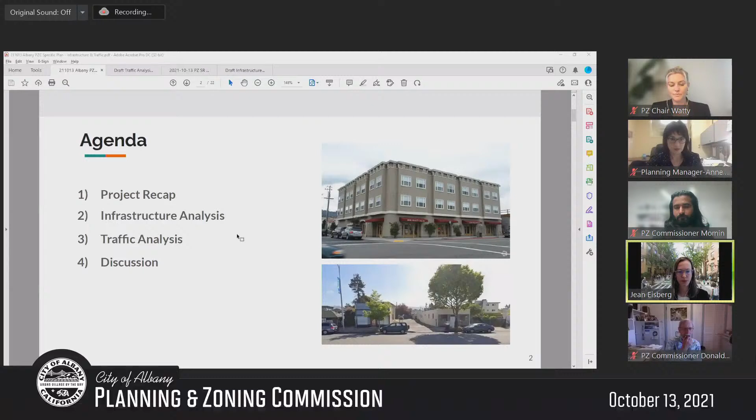So the reasons that we do this are at least three. First, we want to make sure we identify any necessary infrastructure improvements. These are primarily heavy infrastructure improvements, water, wastewater, to support development of the specific plan. So understanding pipe upgrades, things like that. This helps ensure that we want to make sure these improvements proceed in tandem with the specific plan. The general plan talks about this, but we want to make sure those infrastructure systems are in place when the new development comes in.

And then the third piece is that CEQA requires that we do this. So we're also evaluating the plan with respect to physical impacts on the environment, consistent with the California Environmental Quality Act. So sometimes you'll see in the analysis this looks like two different methods. One, we're looking at the impact of the plan as a whole on infrastructure. And two, we're looking at the difference between what the general plan projected and what the specific plan projected. And the reason we're doing that is because we anticipate preparing an addendum to the general plan to satisfy CEQA for the specific plan, so that nexus between the general plan and the specific plan is important.

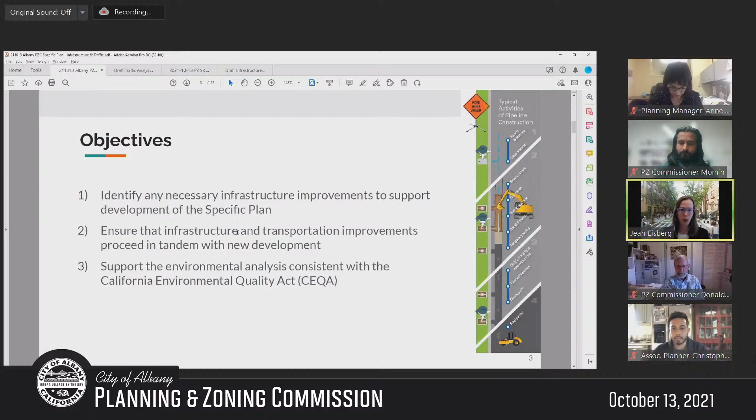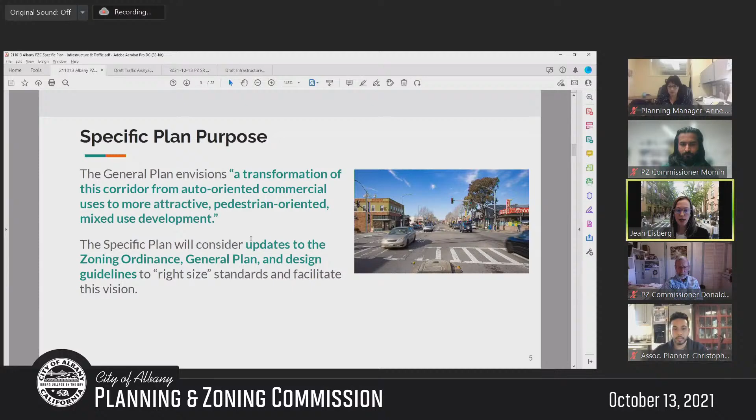So recapping the project, our purpose is dictated by the SB2 application for this, which funds this project and which was endorsed by the City Council. But the gist of this comes out of the general plan, which envisioned a transformation of the San Pablo Avenue corridor from an auto-oriented commercial corridor to more attractive pedestrian-oriented mixed-use development. This does mean we anticipate redevelopment of vacant sites and one-story commercial sites into taller buildings. So the specific plan will look at updates to the zoning ordinance, the general plan, since general plan amendments will likely be required, and changes to design guidelines. The intent is to right-size those standards to facilitate that more pedestrian-oriented mixed-use vision.

So we've seen this slide before, but looking across the corridor from city to city, you can see that Albany's heights are generally lower. In El Cerrito, the height limit's about 65 feet, 85 feet in some places with a density bonus. In Berkeley, it's 40 feet for residential projects or 50 feet for mixed-use projects. And as we've talked about, projects in Berkeley often use state density bonus law, which is how you see that 5 or 6 story development on San Pablo. Emeryville also has a local density bonus program. In Emeryville, we see about 50-foot heights on San Pablo Avenue, but up to 100 feet in certain zoning districts with that bonus. And then Oakland, obviously a much longer corridor within San Pablo Avenue, has a range of heights up to 120 feet downtown.

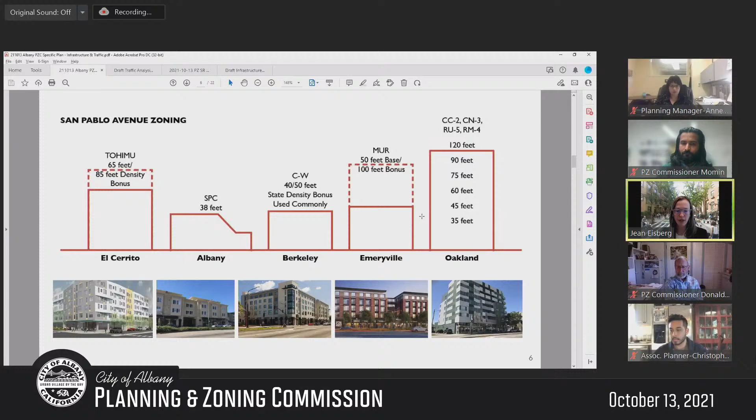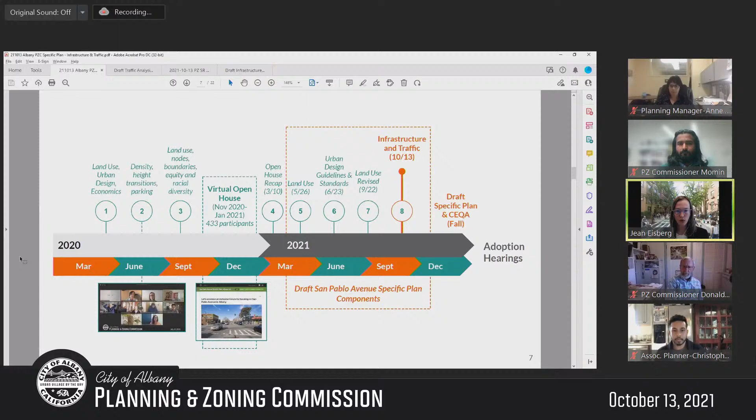So we've had a number of meetings with the Planning Commission along the way, most recently talking about land use just last month. We had a virtual open house over the winter, as you recall, with over 400 participants. Last time we spoke, just a few weeks ago, we did a straw poll that's included in your packet. I know there were some areas or desire to talk about some of these a little bit more, and staff will be coming back to continue those conversations at a later date. But for now, the results of that straw poll are attached to the staff report.

When we spoke earlier this summer in May, we provided an estimate of development potential, or what we call build out of the specific plan. That looked at opportunity sites on the corridor, looked at prototypical densities and heights to anticipate about how many units and how much commercial development could proceed on the corridor. So as you may recall, we predicted about 1,100 units across the corridor and about 45,000 square feet of commercial development.

As I mentioned earlier, there's a substantial amount of commercial development that would be lost due to the new housing. Again, removing about 1-story commercial uses on the corridor and replacing those with housing and smaller footprint ground floor retail results in a net loss of about 74,000 square feet of commercial development.

And so when we think about how we compare, I mentioned earlier, we're comparing the general plan and the specific plan for the purposes of, as we anticipate preparing the addendum to the EIR, that net change between the general plan and the specific plan is important.

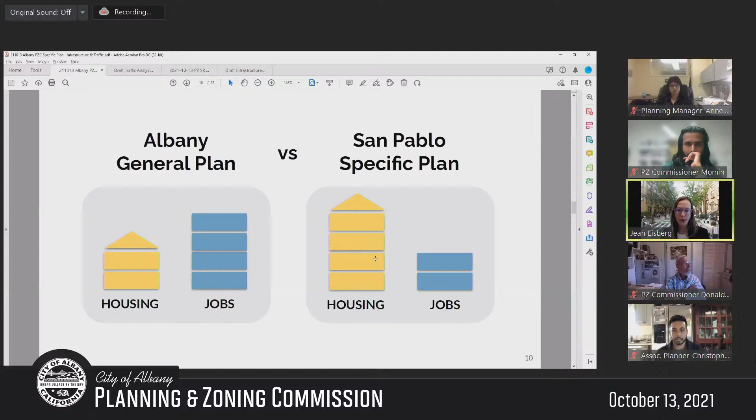So I'm now going to pass it on to Susan, who I introduced earlier. She's made it through the portal, hooray. And she's going to present this next piece of the presentation. Thank you, Susan. Sounds good.

Hi, everyone. My name is Susan Albanus. I'm with Sandis Civil Engineers. Our office is located in Oakland, and we have been brought on board for this process to review the infrastructure in the specific plan area. We were tasked with looking at several pieces of the infrastructure system. We looked at storm drainage, water, sanitary sewer, and the energy systems being electrical and natural gas. And then we also touched on solid waste as well.

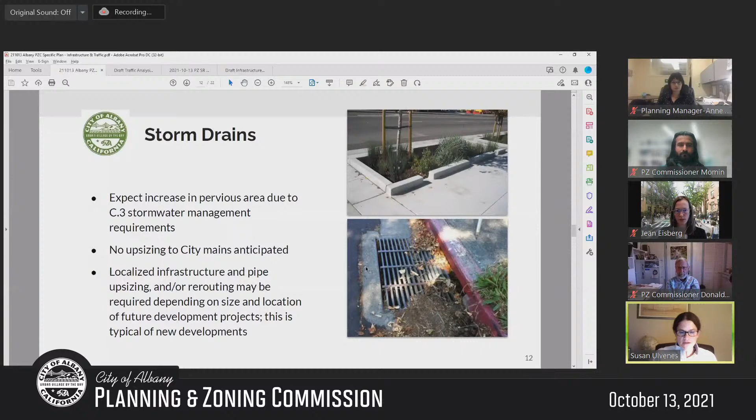So we started our efforts with the storm drain system. We reviewed city block maps. We spoke with city personnel, and essentially the development in the area would see not an increase in stormwater runoff. It would likely be a decrease in stormwater runoff just because of the state stormwater regulations that are passed down to different regions.

So locally, we have the C.3 stormwater requirements that are triggered at various sizes of development, but generally it heavily promotes the use of landscape areas, bioretention areas for treating stormwater, and also promotes the use of pervious pavement and other techniques as well that generally will lead to a reduction in the amount of impervious surface in urban areas that are primarily built out like this area currently is. So we would anticipate a decrease in stormwater runoff as a result of the specific plan area development.

And in speaking with city staff, there have been some system improvements recently for the storm drain system, but there are no anticipated issues with the development occurring due to the forecasted decrease in stormwater runoff. So there really are no current storm drains within the development area that would need replacement or upsizing based on this development.

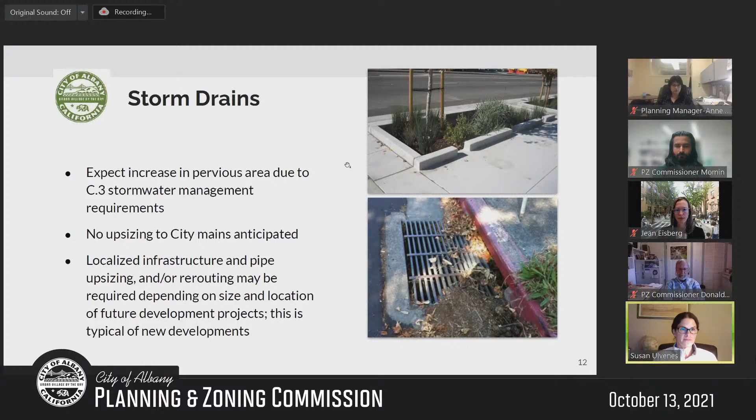Then we moved into water. Water is supplied by East Bay Mud. Again, with the built out area in the San Pablo corridor, there's not a lot of need for, or I would say no need for, additional water piping infrastructure due to the development. During our research, what we found were some old pipes and pipes that are smaller than what may be required for a development such as this.

There are a few 4-inch lines. There's a 4-inch water line in San Pablo and another one a block over. I'd have to look at, let me pull it up, a block over in Kains. There's a 4-inch water line there as well.

In our discussions with East Bay Mud, the 4-inch water line in San Pablo is on their radar for replacement and upsizing. That is not a direct result of any development; that is due to the age and the small size of that pipe. The 4-inch water line in Kains is also on their radar for future replacement, again due to the age. I believe they're about 90 to 100 years old, and the small size.

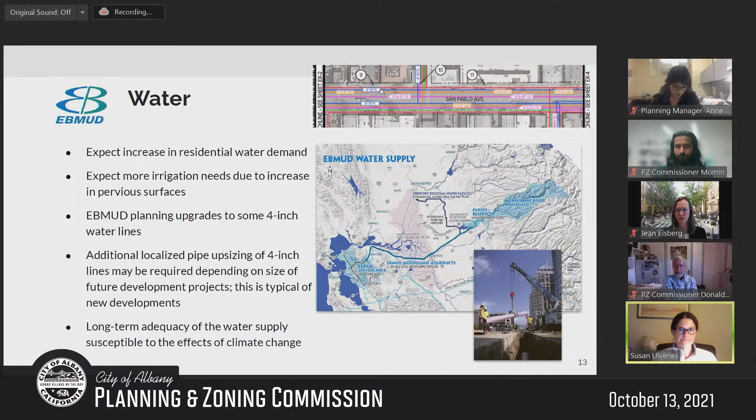Then we looked at the sanitary sewer in the area. Again, spoke with city personnel, looked at block maps, talked about any areas experiencing issues. And again, there are localized sanitary sewer pipes that either have been upsized or will be in the near future due to capacity issues.

However, looking globally at the San Pablo corridor development, there's no known pipelines that would not be able to support the development, looking at it as a global development. When a particular developer comes in and may be developing a parcel, there may be upsizing of lines or extending of utility lines necessary to feed that new development. If, for instance, it's going from single family residential to condos, townhomes, or commercial space, there may be a need to upsize a line or extend it further up the street. However, that wouldn't be something due to the overall development along the corridor—that would just be something the developer needs for that particular building.

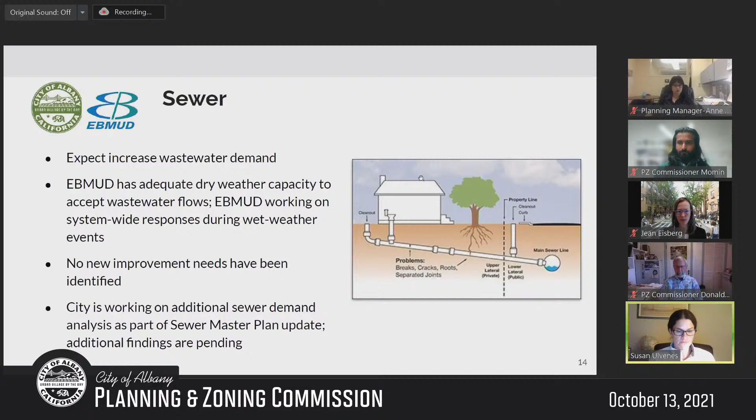As far as energy, as I mentioned, we looked at electrical and natural gas. This is provided by PG&E. Again, due to this being an urban built out area, the infrastructure is there, the supply—PG&E would not commit to supplying the development. That process gets triggered by filling out applications; that's when they make that determination. However, there was no indication or red flags. Generally, the infrastructure is in place, the existing buildings are being supplied by gas and electric. So there were no necessary infrastructure upgrades noted in the report for either gas or electric.

The same also goes for telecom. We touched on this in our research. Generally, internet and cable is supplied by a handful of providers, including Xfinity, AT&T, Earthlink, Sonic. Again, the infrastructure is in the ground or in the vicinity, and the buildings are currently supplied with telecom, so there aren't any anticipated upgrades needed there.

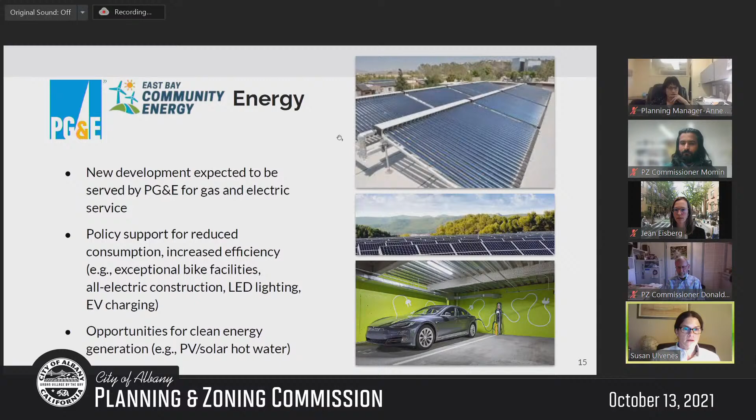Solid waste—again, looking more globally at where the waste is taken, the transfer station, the landfill, the recycling facility, the contacts we reached out to, the research we did—again, no concerns or changes needed for the development in the area.

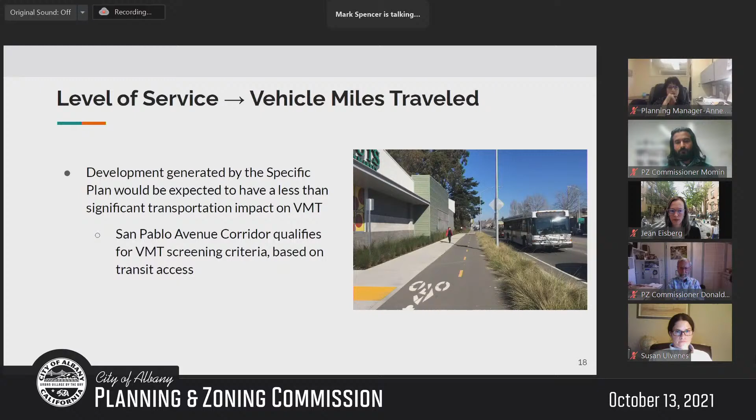On the next slide, please. Now, level of service is something we've typically looked at. In the case of the general plan in Albany, we looked at San Pablo Avenue and certain segments in terms of an A, B, C, or D. What we found is that under existing conditions, we're hovering around a level of service D, generally acceptable, but on the border.

You'll say, well, I drive San Pablo every day, as many of us do. I know it's congested, I'm waiting several cycles at lights, having trouble getting through from one end to the other. That's true, that is part of the effect. But in general, it's still an acceptable overall level of service when you look at it in totality. It doesn't mean we don't have periods of congestion or spot areas of congestion.

With the general plan, not the specific plan, the general plan itself was going to cause a shift from a D to an E on certain segments and certain times of day as we move through the corridor in Albany. That general plan reported that. What we wanted to look at is what's the difference with the specific plan now and the change in land use compared to the general plan. Would the specific plan result in anything getting worse, better, really any changes?

What we found is that it's actually very similar. The directionality of traffic does change a little bit because of the shift between residential and commercial activity, but in general, it doesn't change the service levels projected from the general plan to the specific plan. I'll explain why in the next slide.

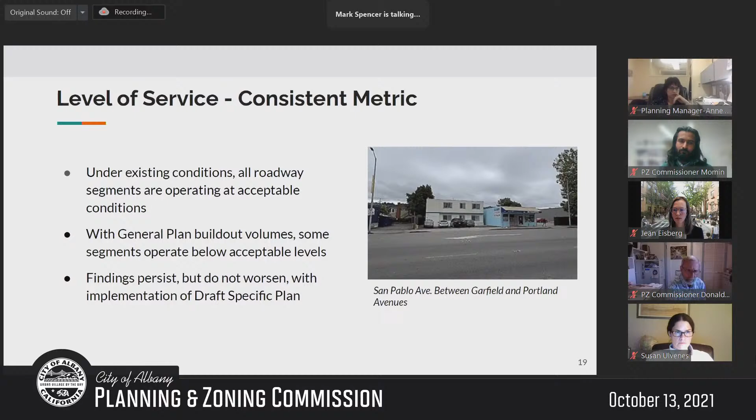The land use shift results in a change not just in land use, but also trip generation. As we analyze this, and this is in the report and background materials we prepared, in totality, when you look at the specific plan and the change in land use, we're going to have about 2,000 fewer daily trips on the road.

On a peak hour basis, which is really what we look at for traffic operations, in the morning it's actually about the same number of vehicles. There's fewer inbound and more outbound because with more housing, you have more people leaving and going to jobs in other cities and other locations. So you'll have that shift of people leaving in the morning, but the net effect is you also have less coming in because you'll have fewer jobs under the specific plan compared to the general plan. So that's pretty much a wash in the morning.

And in the afternoon, as commuters come back, you have that shift in travel patterns again. The net effect, though, in terms of the numbers, is we have about 260 fewer PM peak hour trips than we would have had under the general plan as it was proposed. So we're seeing reductions in traffic, and those reductions are leading to the fact that we're not seeing changes in service levels compared to what was projected in the general plan.

The numbers are not that great on the grand scheme of things. There's a lot of traffic in the area, so we're incrementally changing things, but not to any great effect. That's actually good in a sense, because if we're achieving other objectives, we recognize that we're not changing things dramatically on the traffic operational front or on the CEQA front. Next slide.

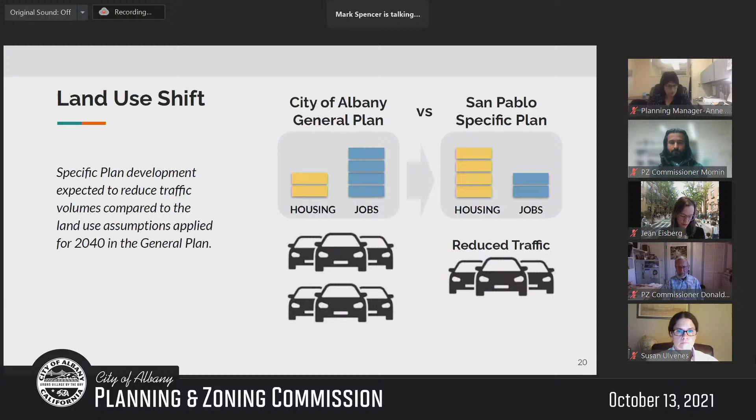Lastly, I just wanted to talk a little bit about policy implementation. I know this has come up in the discussions, and we were asked to touch upon it briefly in our transportation report. The city has gone through several efforts over the past decade in terms of adopting an active transportation plan, having a complete streets plan, the circulation element from the general plan, and even the Alameda CTC San Pablo corridor project, which is underway.

All of these have measures in place to talk about active transportation — how do we encourage more bicycle use, what kind of bicycle facilities, what kind of pedestrian facilities, how do we have good access to transit. The complete streets plan is about a street for everybody. So what does that mean? How do we allocate within the right of way — our lanes, our parking, our bicycle facilities, our pedestrian facilities, all of that. There's a lot of effort that's been put into thinking about that.

The specific plan that we're talking about tonight doesn't change any of those. It takes advantage of them in the sense that we're going to have more people in the area. We are going to have to figure out how to accommodate those people and move them to transit, move them into their vehicles, circulation, transportation, all of that goes into the area. But we're not actually taking away or deteriorating from anything that's been previously proposed. And that's good — it actually supports all of these types of policies that the city has already adopted and been focused on.

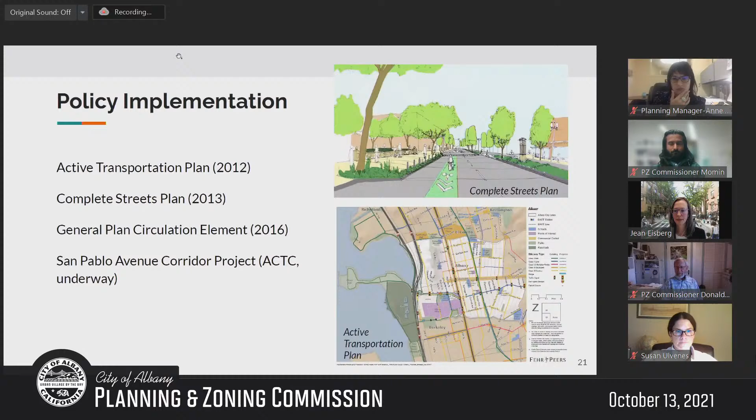Regarding the sanitary sewer, there was a question, and I think the consultant addressed it about some studies pending on the sanitary sewer. Can you speak to that a little bit more? It sounds like your initial analysis was that there's capacity, but there's some further study being done. Is that the gist of it, or can you expand a little bit more?

Sure, I can speak to the sanitary sewer. Was there a specific question or area? Well, if there's any pending studies to be done — and this was noted by at least one member of the public too — can we really sign off on the sanitary sewer being the right size, or do we have to wait for the results of the pending study?

I see. Jean, maybe you have some thoughts here too.

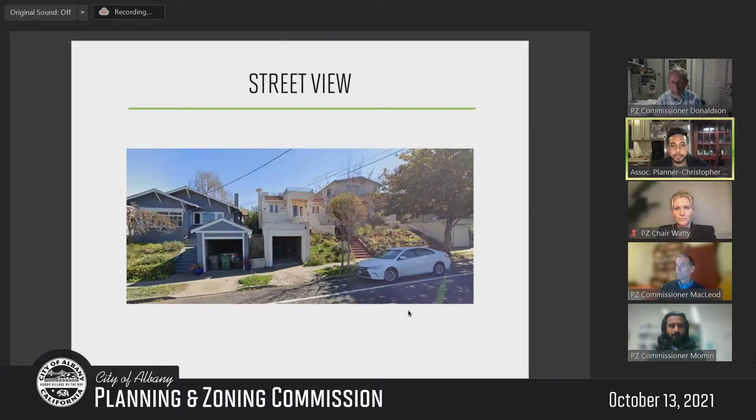Project requests: the applicant is seeking design review for an 857 square foot second story addition, a parking exception to allow a second off-street parking space in the front yard triggered by the proposed addition, and a conditional use permit to vertically extend the existing non-conforming north wall to accommodate the second story construction. Altogether, this project would result in a 5-bedroom, 3-bathroom, 2,099 square foot home with a maximum height of 27 feet, 11 inches.

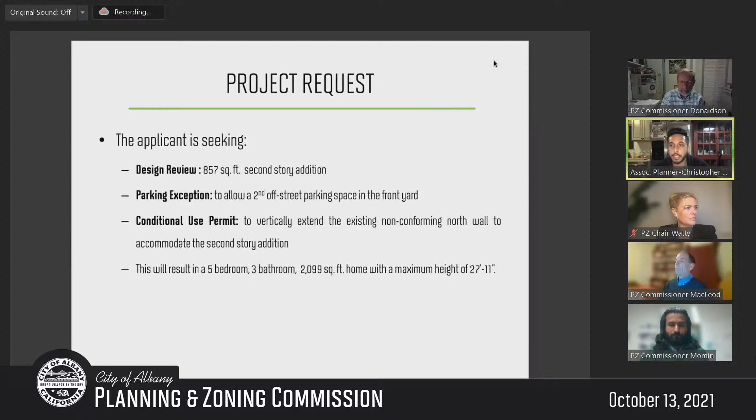Exceptional design. Projects which exceed 0.45 FAR are subject to exceptional design as reviewed by the Planning and Zoning Commission. These exceptional design treatments include a new craftsman style for the home, fiber cement horizontal lap siding on the exterior, relocating the existing garage under the home and establishing a new driveway via excavation, gable roof forms with decorative brackets under the eaves consistent with the craftsman style, wood fascia for all the roof forms, wood windows with fiberglass exterior cladding throughout the home, and a new wood deck in the rear yard.

Average perimeter height. Pursuant to section 20.24.050 floor area ratios of the Albany Municipal Code, the applicant is seeking to exempt the proposed lower level of the home from FAR calculations. What this means is for partially subterranean spaces of the home that have an average perimeter height of 5 feet or less, the area is excluded for purposes of calculating the FAR per the zoning code. The average perimeter height of the lower level of the home is proposed to be 3 foot 11 inches and thus has not been factored into the overall FAR calculations.

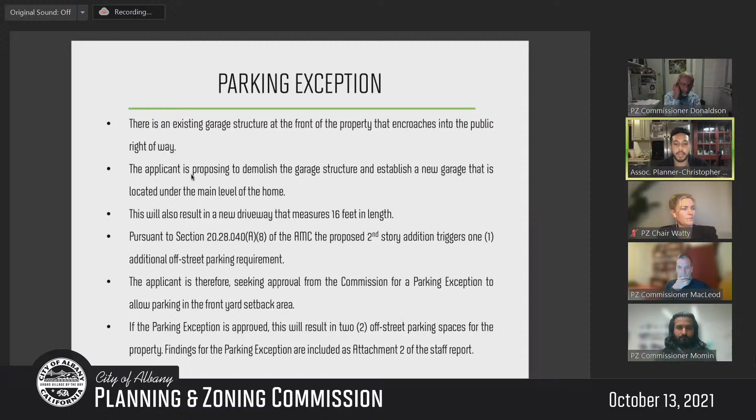Pursuant to section 20.28.040(A)(8) of the AMC, the second story addition does trigger an additional off-street parking space. Therefore, the applicant is seeking approval from the commission for a parking exception to allow parking in the front yard setback area. If the parking exception is approved by the commission, this would result in a total of 2 off-street parking spaces for the property. The findings for the parking exception were included as attachment 2 of the staff report.

Here is an excerpt of the site survey. You'll see that the garage structure is located here at the front of the property. From the front property line to the porch face is a little over 16 feet. And by demolishing the garage, that would leave a driveway that would be a little bit over 16 feet in length.

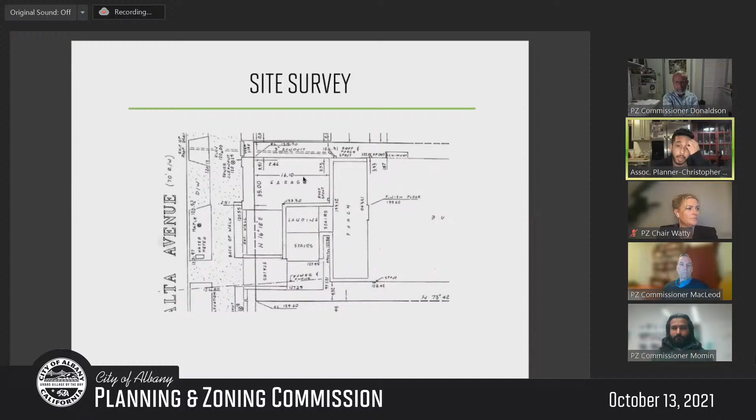Conditional use permit. The side yard setback requirement for the R1 zoning district is 10% of lot width, or in this case, with the subject property, 3.5 feet. The existing north wall of the home is slightly non-conforming with current setback regulations and is located 3.33 feet from the property line, where 3.5 feet is required. The applicant is proposing to vertically extend the non-conforming north wall to accommodate the proposed second story addition. Pursuant to Table 2A of Section 20.24.020 of the zoning code, a conditional use permit is required to vertically extend this north wall. The applicant is seeking approval from the Planning and Zoning Commission for the CUP to extend this wall.

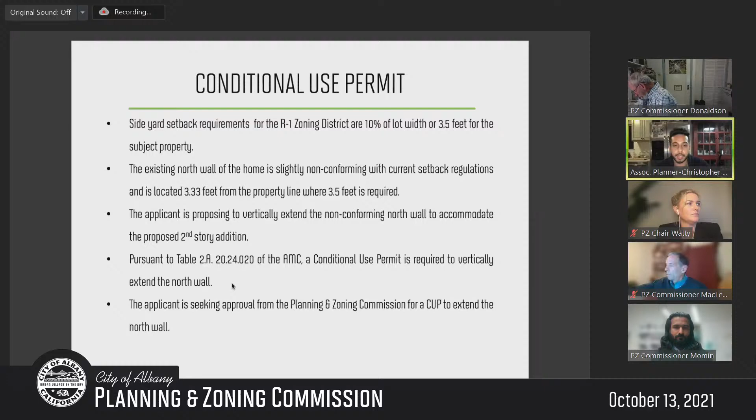Staff has received 1 formal correspondence in support of the project, praising the thoughtful design. The project is categorically exempt from CEQA per section 15303. With that, staff recommends that the Planning and Zoning Commission review and approve the proposed project subject to the findings and conditions of approval. Staff is happy to answer any questions, and we have the applicant in attendance as well.

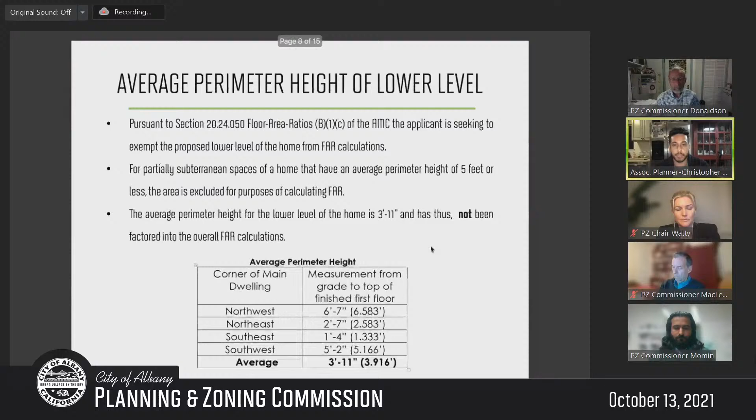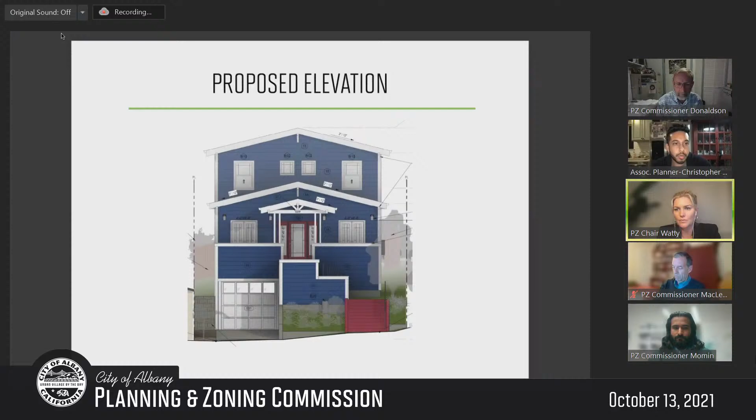Thank you. Great. And maybe before we open it for questions, does the project applicant have a presentation as well? I don't know if they have a presentation prepared, but her hand is raised, so I can let her speak. Sure, why don't we go ahead and open it up to the project sponsor, and then we'll turn it back if there are questions from commissioners.

Okay, can you hear me? Yes, we can. Thanks. Great. Thank you so much. And great presentation, Christopher. I really appreciate that. So I don't have a presentation. Christopher covered, I think, the basics for you.

I just wanted the opportunity to say hello and thank you all so much for your time and consideration of our project. My husband and I are really excited to raise our kids in the Albany area. We are so happy we finally found a home here. We've got 2 young kids. We love the neighborhood, the people we've met, the parks. And as our family is growing with kids and both of us working from home now to avoid costly commutes and spend more time with our kids, we do need more space.

And that's why we're proposing this expansion. We also want to apologize - you may have noticed some labeling errors. We originally intended to use the rooms as a family room and 4 bedrooms, but recognizing that the family room has a closet and not wanting it to look like we were hiding a bedroom, we made a last minute change to show it as a bedroom, which resulted in 2 bedroom number 2s. So we apologize for that.

The last thing I'd like to say is that we are certainly considering environmental concerns as something important that we care a lot about. Specifically as a structural engineer, I find that one way we can affect these concerns is to build resilient homes and buildings out of quality materials that will last through earthquakes. So I'm designing this home to be seismically enhanced, and we're carefully considering all building materials because we really want to make sure this is a home that will last. Thank you so much for your time.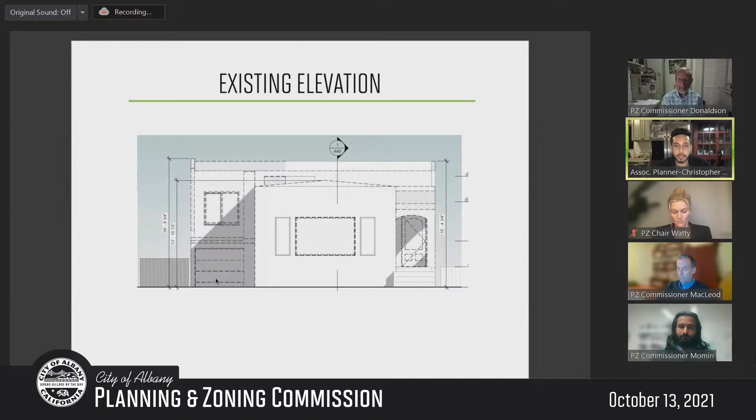The applicant is seeking design review for an 800 square foot 2nd-story addition to accommodate 2 bedrooms, 1 bathroom, and a new master suite on the 2nd floor. A conditional use permit is also being sought to demolish and rebuild a portion of the south wall, which is the garage, to address some dry rot repair and accommodate a new garage door. This overall project scope would result in a 4-bedroom, 3-bathroom, 2,049 square foot home with a maximum height of 27 feet. Here's an existing elevation of the home, and here's the proposed front elevation.

Exceptional design. Projects which exceed a 0.45 FAR are subject to exceptional design as reviewed by the Planning and Zoning Commission. These design treatments include a new contemporary architectural style for the home, exterior cladding in a combination of painted stucco and horizontal composite siding, a standing seam metal shed roof with a 12:3 slope for the second story, and double hung, slide, and fixed windows proposed throughout the home.

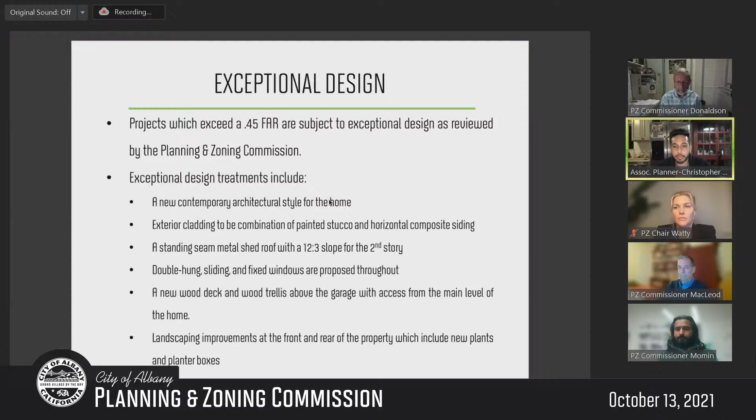A new wood deck and wood trellis above the garage space with access from the main level is proposed as well. A landscape plan was submitted indicating modest improvements to the front and rear of the property, including new plants and planter boxes.

Conditional use permit. The side yard setback requirement for the subject property is 3 feet 9 inches, or 10% of the lot width. The existing south wall of the attached garage is located 2 feet 6 inches from the property line and is thus non-conforming with respect to side yard setback requirements.

The applicant is proposing to demolish and rebuild a portion of the south wall to address dry rot and repair, and to accommodate a new garage door. A conditional use permit is required to demolish and rebuild the wall due to its proximity to the southern property line. The applicant is seeking approval from the Commission for the conditional use permit to rebuild the non-conforming south wall. Findings for the conditional use permit were included as attachment 2 of the staff report.

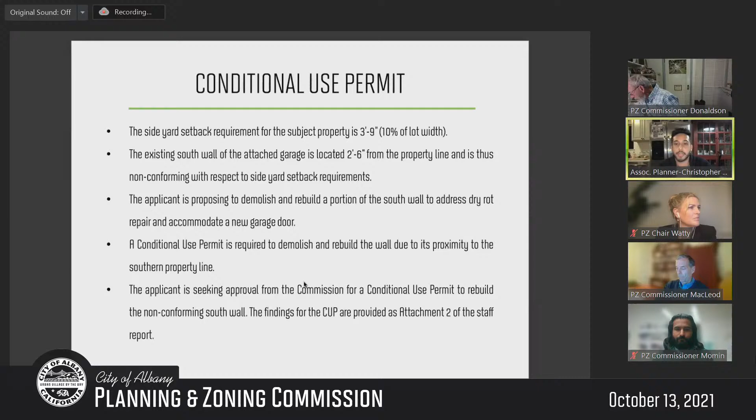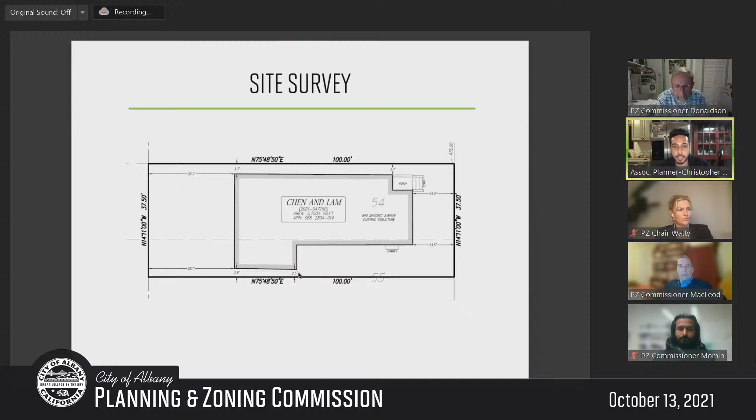And then here's a view of the site survey. You'll note that at its closest point, the garage wall is 2.5 feet from the property line, and at its widest point, 2.8 feet. There's an existing attached garage toward the rear of the home.

With respect to parking, there's an existing attached garage toward the rear of the home, which currently accommodates 1 off-street parking space. The applicant is proposing to demolish the front portion of the garage and rebuild it in kind. A total of 2 off-street parking spaces are proposed, 1 in the existing garage and 1 in the driveway in a tandem configuration. No additional off-street parking is required for this project.

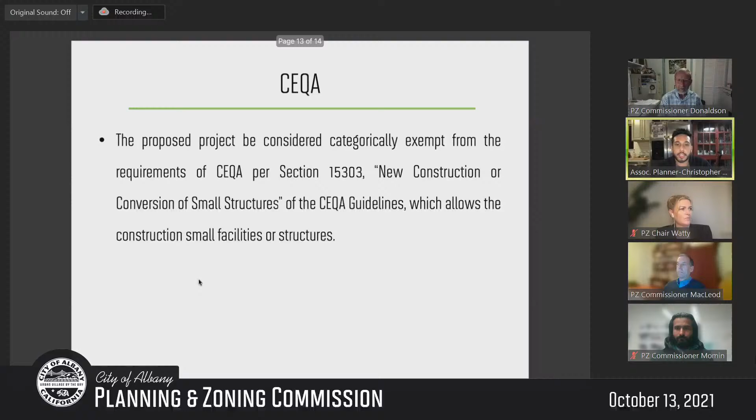Staff has received 1 correspondence from a neighbor voicing potential privacy concerns with the elevated deck and trellis above the garage. The project is categorically exempt from CEQA per section 15303. With that, staff recommends that the Planning and Zoning Commission review and approve the proposed project subject to the findings and conditions of approval. And with that, we're available to answer any questions. Thank you.

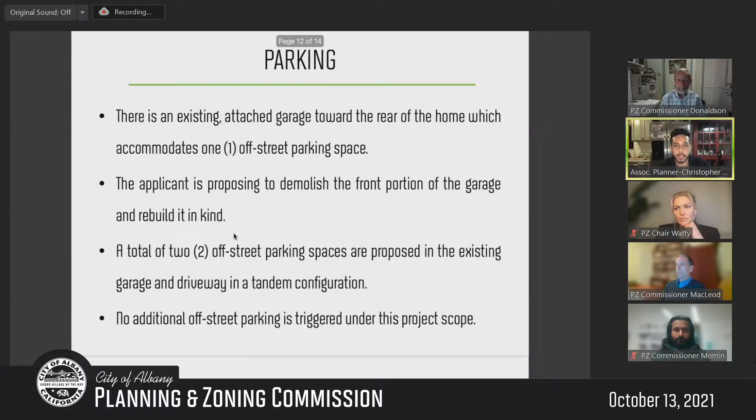Great, thank you, staff. Maybe similarly, we'll just have the project sponsor here with a presentation. Yes, I saw the project applicant. She is here. I'll allow her, Sujin, to speak. Yeah, why don't we go ahead and let her speak, and then we'll turn it back to the commission for questions. Okay, Sujin, you can speak whenever you're ready.

Christopher. Hi, Hi Sujin. Hi, can you let Dongjin speak for this project? Sure, one moment. Hello, hello, hello, can you hear me now?

Yes, hello. Okay, my name is Dongjin Seo. I'm a project designer for this project. Thank you for having me here today, and let me introduce this project briefly.

This new addition will be home to our client who has two little kids, one little boy and one little baby girl. The most important thing for our client is actually having all 3 bedrooms for their parents and kids at the same location. They are really concerned about taking care of their baby, so whenever there is a need, they want to be immediately accessible to their kids. That's the reason they added the second story addition where all 3 bedrooms are co-located.

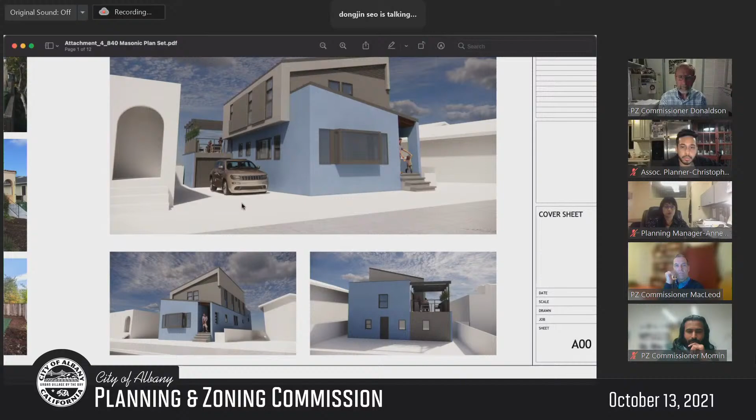Another thing, over the new exterior deck, we consider the privacy concern to the neighbor on the south side. So we introduced a fixed planting box, so that it gives a little bit of a solid surface to improve the privacy between these two neighbors.

So I think that's about it, and thank you very much for your time. I will appreciate any kind of comment on our project. Thank you very much.

Thank you. Commissioners, are there any questions for either staff or for the project applicant? Commissioner MacLeod, go ahead. I guess I have one question for the applicant.

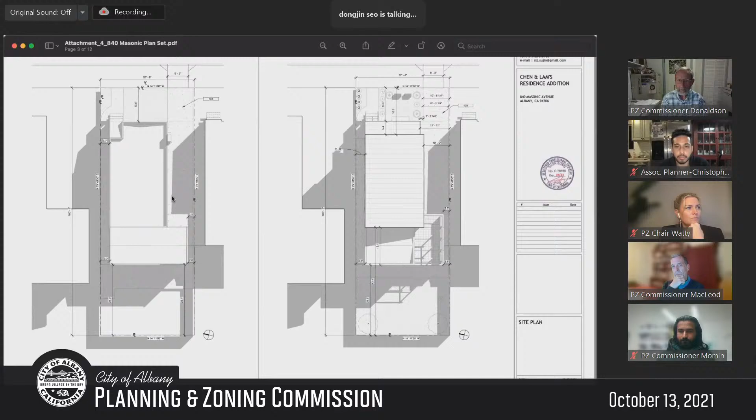Are you vaulting the interior spaces on the second floor underneath that big shed roof? Yeah, of course we take advantage of this roof shape as much as possible, but part of that space will be dedicated to the mechanical unit up there. But yes, we'll consider the higher ceiling for the bedroom along the north side. So it's not fully reserved yet.

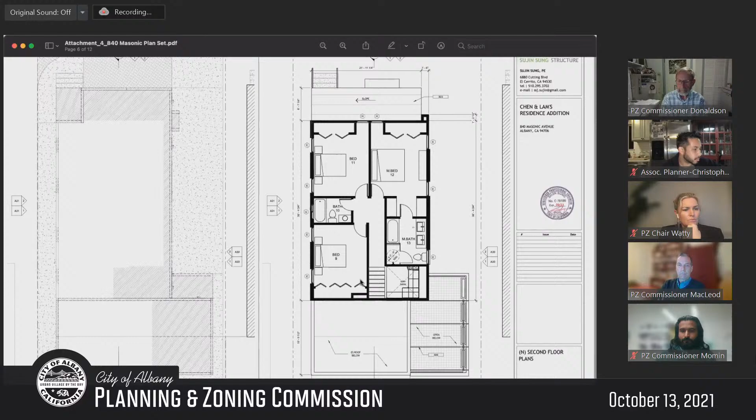Okay, thank you. I had a couple questions for the project engineer here. Can you clarify a little bit when you reference the composite siding? Can you give a little more detail of what that actual material is?

So the product that we are really looking at is actually the NewTechWood. This is a composite material, composited with wood and plastic. This material gives you the real wood look. Also, there is a color option that our client is really looking at, so it's pretty much similar to the rendering. The tone is a little bit different, but it's pretty much similar in texture and color to the rendering. So we consider that as the NewTechWood for the composite siding.

Got it, so it's a wood plastic composite material. Correct. That has a texture of wood, like a wood grain finish. Exactly, yes, correct. Okay, thank you on that.

And then just to clarify, so the windows that you're calling out according to the window schedule are Andersen 400 series. So those are vinyl clad windows, is that right? Correct. Okay.

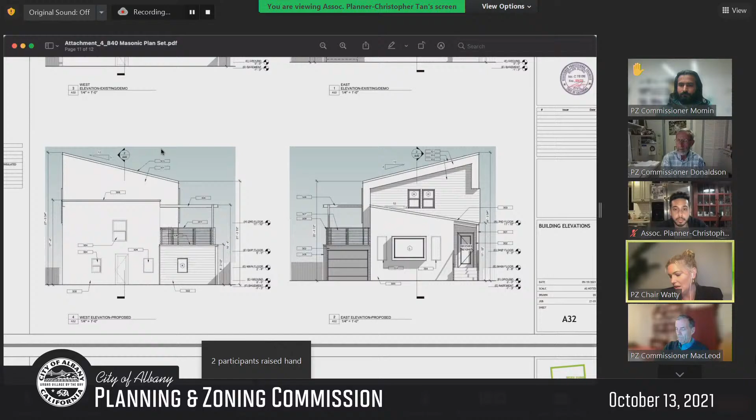And then I think those were my only—oh, maybe one other question. I'm just a little bit curious on the design intent along the north side of the second story addition, where that composite siding is applied, it just kind of spans. It feels a little arbitrary between the east and west side windows on that north side. I'm wondering if you can talk through what your design intention was, or sort of vision for it. It just, from the elevations, feels a little tacked on, but perhaps you can talk through your design intention there.

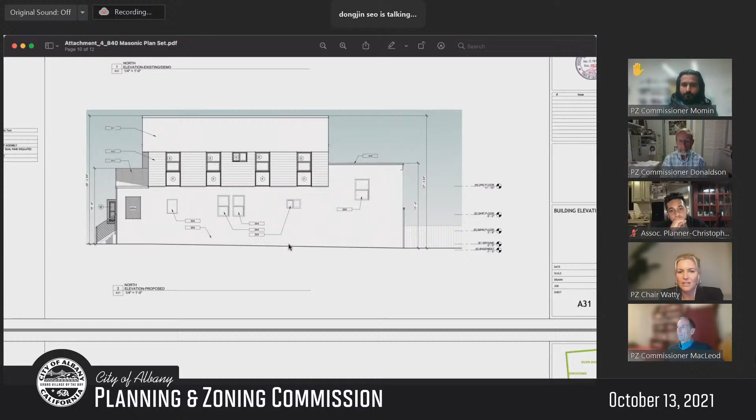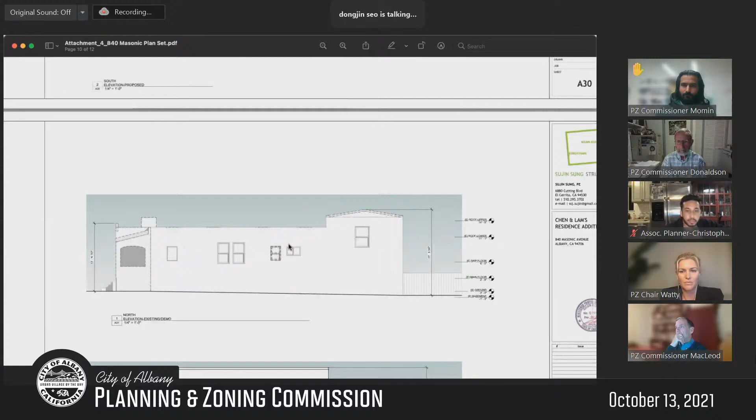Yeah, I know that it is really hard, of course. Because of the setback issue, this whole facade is really just flat. But the way I read the massing here, if you're looking at maybe the rendered three-dimensional view, it will be more clear. There is basically a bluish box at the bottom, and then there's a layer around the second volume, which just stops at the head of the second story window. So that's the actual concept. Actually, it would be great if there was a little bit of an offset from the composite material to the stucco above—then it would express the composition better, I think. But well, unfortunately we can't; it's got to be just a straight wall. So I think it's a little hard to achieve that kind of composition.

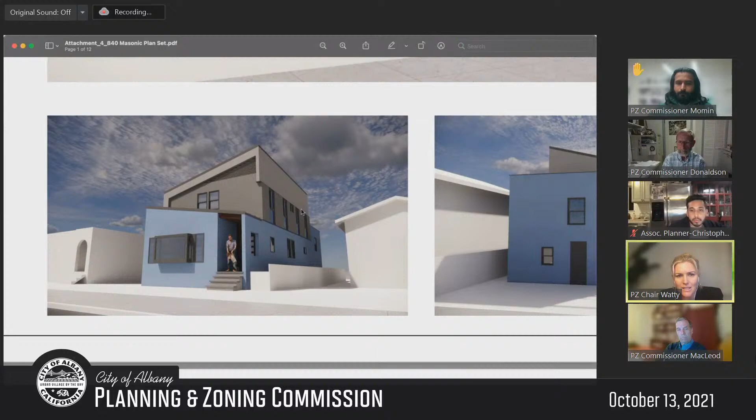And I was on the north face of the second story addition. So Chris, I think that's the south side that you're showing there on the bottom left. That is the north side. Oh, that is the north side. So this image is—oh, I'm sorry, right, I meant the south side. I meant the south side.

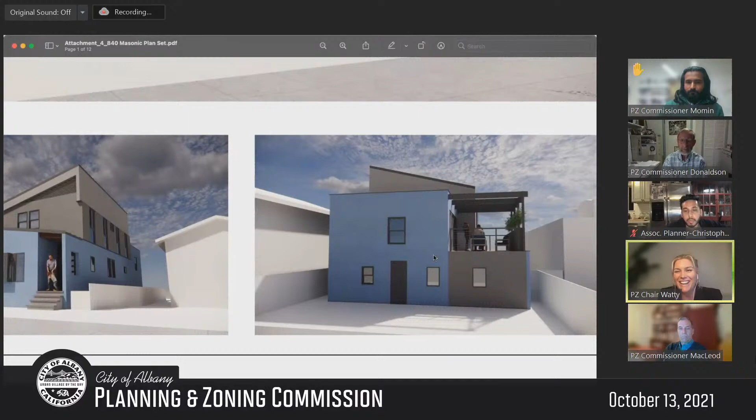Oh, you meant the south side, sorry. Don't know why you wouldn't know what I was thinking there. No, on this side, yes, where it's sort of applied between the two windows.

Just talking about how does that get detailed, given that it looks like it's probably just a couple inches proud of the primary building wall.

Yeah, I think in reality this is a rendering issue. I think it's not as accurate as the detail. I think the detail will have this siding material pretty much flush with the stucco finish. Okay, the elevations do show a couple inches as well, so the elevations seem to match the rendering, but I wasn't sure how that transition would be detailed.

Yeah, there will be metal flashing between the stucco and composite wood, so there will be a continuous flashing line there. Okay, so instead of there being this shadow line, it will be flat with flashing separating the stucco from the composite siding? Correct. Okay, thank you, I think that's all of my questions.

Commissioner Momin, you had your hand up, then we'll go to Commissioner MacLeod. Yeah, just a minor question about the composite panels. How do the composite panels perform in ultraviolet light, like prolonged sunlight exposure? Is there any possibility of them getting discolored? And if they do, what is your remedy for that? Would you be painting them?

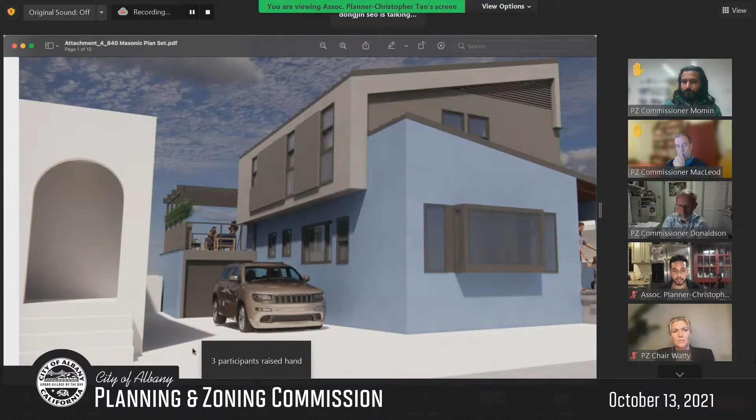No, there's no painting on it. You can think of this as kind of a Trex version of the siding. There is a little bit of sheen to it, a little bit of reflection. It's pretty much similar to typical wood siding.

Okay, so they don't get discolored over time, you mean the UV matter? Yeah, so I think this product is a little bit better than the previous version of the composite material. Okay, that's it, thank you.

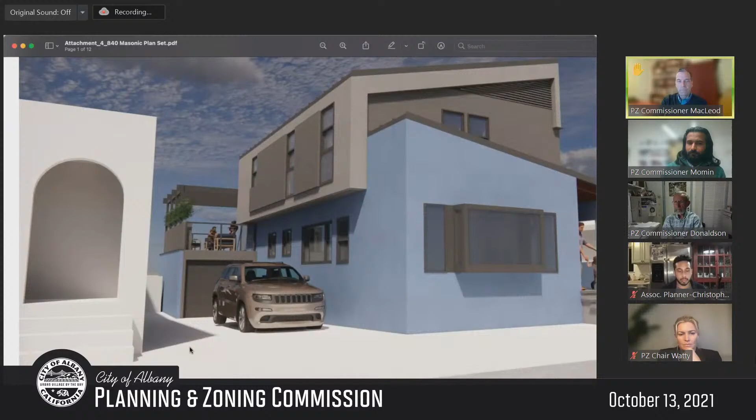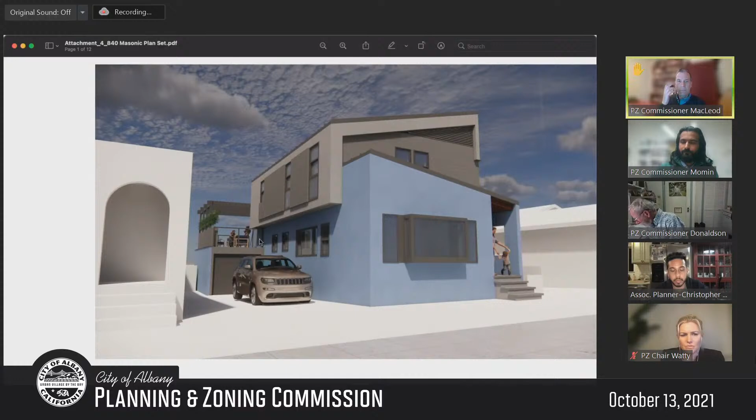Commissioner MacLeod? Yeah, my question is for staff. We have the non-conforming wall at the garage, but then the roof deck is actually extending into the non-conforming space, or into the setback. Isn't that required to have a conditional use permit to have a deck within a setback? I just know in my work, if we start extending into the setback with the roof, with any kind of deck, we are faced with additional requirements or restrictions.

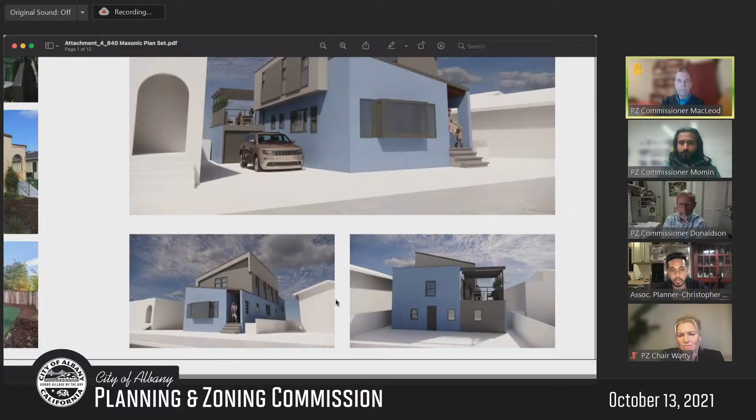So could you respond to that, please? I mean, basically the deck will be non-conforming. It's effectively a vertical extension of the non-conforming wall, which is how they can build that deck out. Of course, they'll have to, they're rebuilding a portion of that wall. They'll have to engineer that for live load on top, but they can do that through the use permit process.

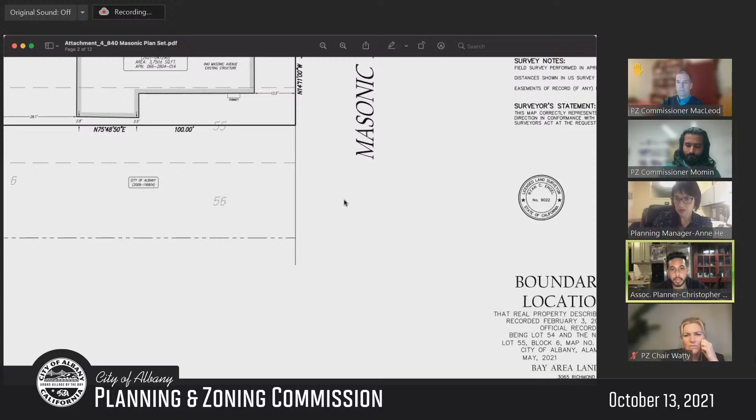So is that part of our conditions of approval, that the roof deck is allowed to be non-conforming? Seems like we're not addressing that. The use permit can cover the deck, yes. The code isn't explicit about roof decks in that encroachment area, because we're talking about the wall plane itself, since it's not a fully built wall. It can, the conditional use permit can also apply to that.

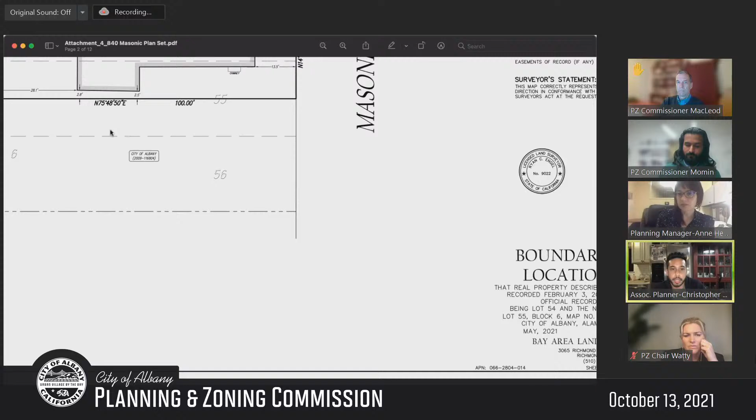Alternatively, a condition can be placed that the roof deck be recessed to be compliant strictly with setback regulations above the garage, but there was an existing wall there originally, which the applicant is proposing to remove to accommodate the FAR, reconfiguring with the second story addition. So there was a wall there above it that's enclosed, but the applicant...

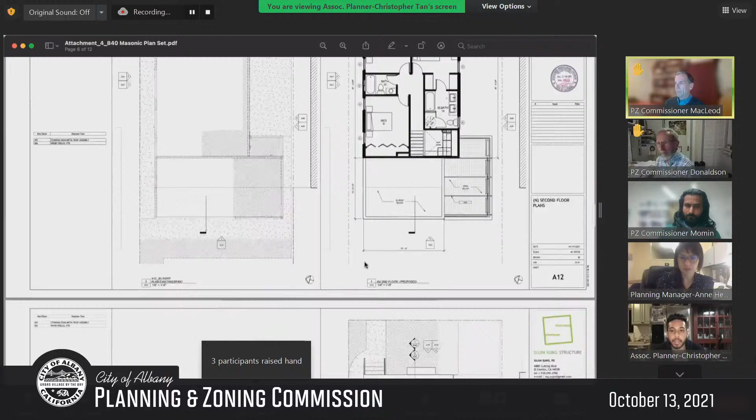Okay, so there was a second story structure there above? Yeah, if you look at, we can look at, oh I see, on the south elevation of the existing there was a room. It was all originally enclosed, yeah, where that deck is. Okay, so, all right, I still... right here, yep.

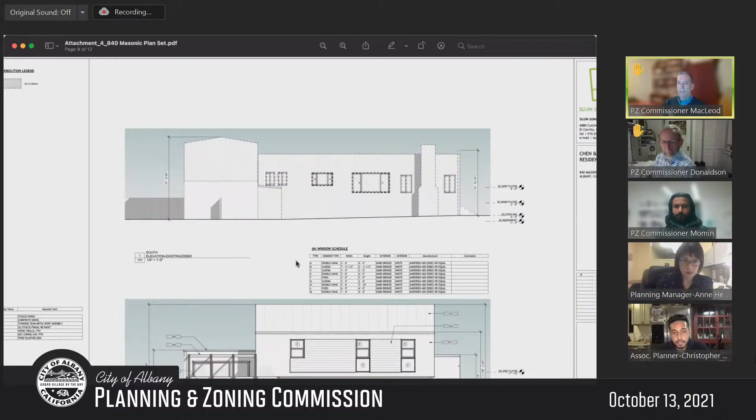So we are being asked to extend that, that non-conforming wall becomes part of the deck. I'm still a little confused as to how that deck is being approved in our language, or in the language of what we're asked to look at tonight. So, Ian, I had the same...

Am I on? Yeah, I'll just listen here. That's fine. I had the same thought, and then I went back and reread the staff report, and the sentence I thought was important said a conditional use permit is required to demolish and rebuild a portion of the garage and build a new roof terrace.

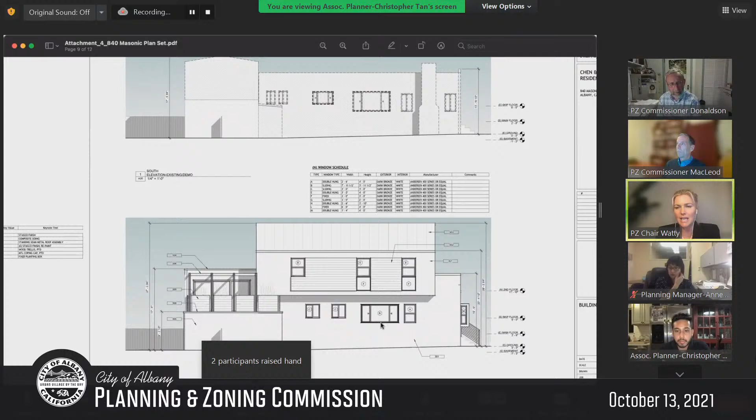Good evening, thank you. So my question really is concerning the fire department's access to the one side. I guess it was less than 3 feet from the garage to the side wall. I'm not sure if I'm correct or not. I was just curious what the setbacks are for the fire department. I don't know if it's 3 feet or 5 feet or whatever the setback is.

And also, my next question was going to be, what kind of smoke alarms and fire detectors, carbon monoxide, are you going to be putting in the addition? Whatever you're putting in, I don't know. I would suggest the 10-year detector. That way you don't have to use the 9-volt batteries every year, those always go out. So my suggestion, use the 10-year, and also please let me know what the setbacks are for the fire department. Thank you.